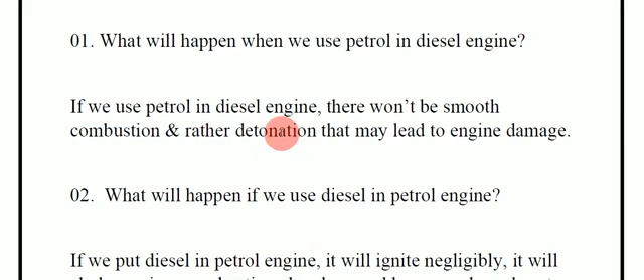First question: what will happen when we use petrol in a diesel engine? If we use petrol in a diesel engine, there would not be smooth combustion, rather detonation, that may lead to engine damage.

Second question: what will happen if we use diesel in a petrol engine? It will ignite negligibly, choke the engine's combustion chambers, and leave smoky exhaust.

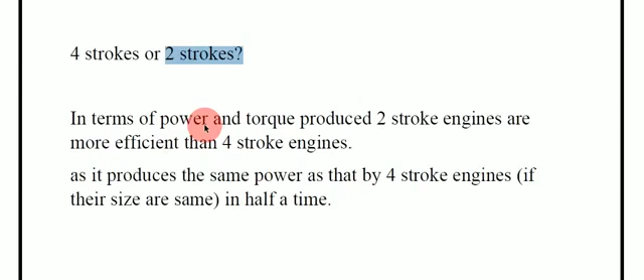Which one is more efficient, 4-stroke or 2-stroke? In terms of power and torque produced, 2-stroke engines are more efficient than 4-stroke engines, as they produce the same power as a 4-stroke engine of the same size in half the time. In terms of fuel consumption, 2-stroke engines are less efficient, and 2-stroke engines exhaust more pollutants than 4-stroke engines.

This is a very important question, so remember the difference and which one is more efficient between 4-stroke and 2-stroke. In terms of power and torque produced, 2-stroke engines are more efficient than 4-stroke, producing the same power as a 4-stroke engine of the same size in half the time. In terms of fuel consumption, 2-stroke engines are less efficient, and 2-stroke engines exhaust more pollutants than 4-stroke engines.

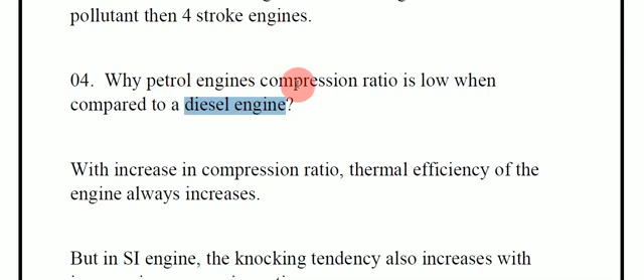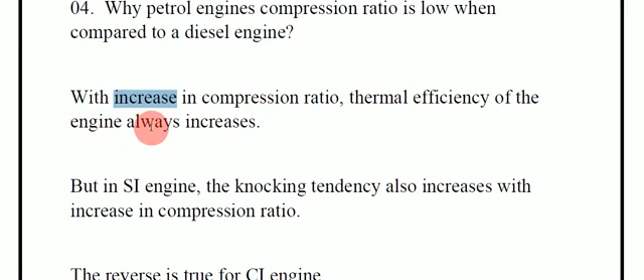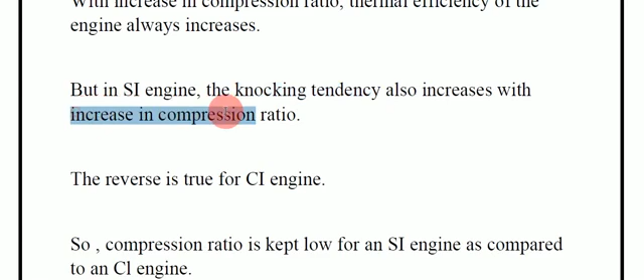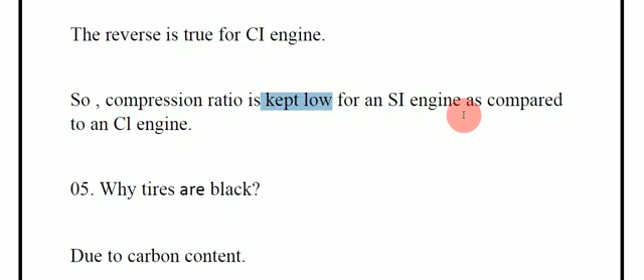Why is petrol engine compression ratio low compared to diesel engine? With increase in compression ratio, thermal efficiency of the engine always increases, but in a spark ignition (SI) engine, the knocking tendency also increases with increase in compression ratio. The reverse is true for a compression ignition (CI) engine. So compression ratio is kept low for an SI engine compared to a CI engine, because of thermal efficiency.

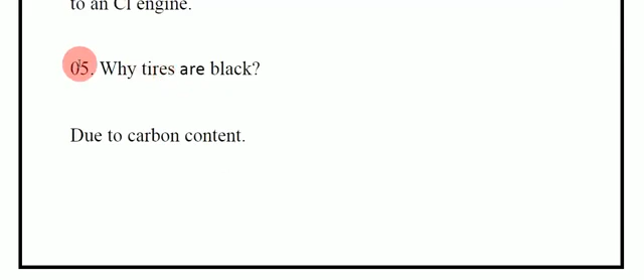Why are tires black? Due to carbon content, the tire is black.

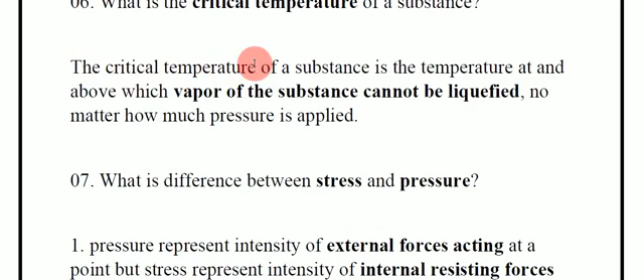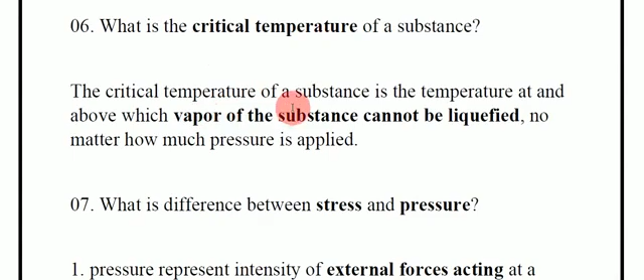What is the critical temperature of a substance? The critical temperature of a substance is the temperature above which the vapor of the substance cannot be liquefied, no matter how much pressure is applied.

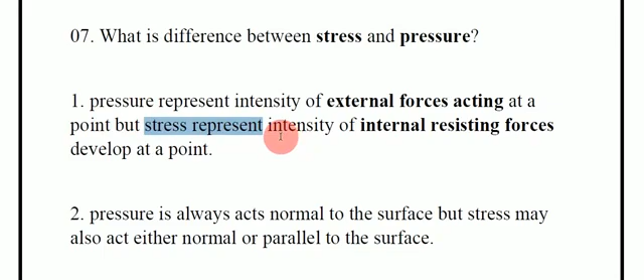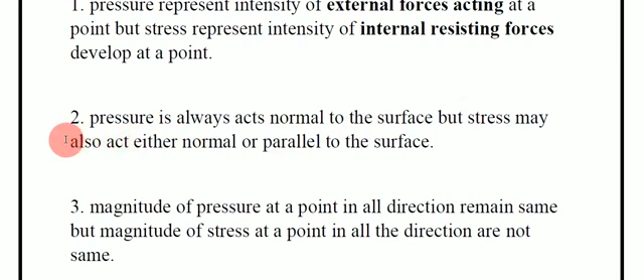What is the difference between stress and pressure? Pressure represents the intensity of external force acting at a point, but stress represents the intensity of internal resisting forces developed at a point. Also, pressure always acts normal to the surface, but stress may act either normal or parallel to the surface.

Magnitude of pressure at a point in all directions remains the same, but magnitude of stress at a point in all directions is not the same.

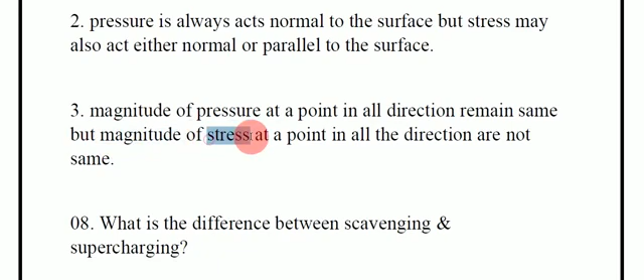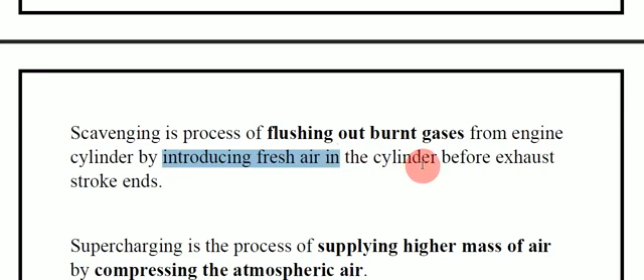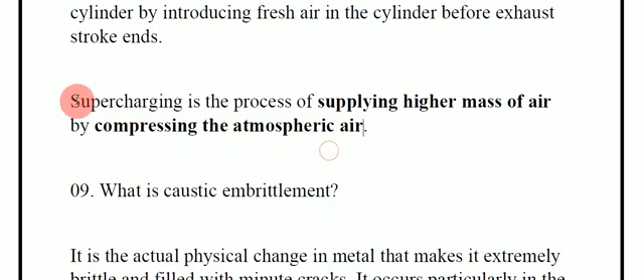What is the difference between scavenging and supercharging? Scavenging is the process of flushing out burnt gases from the engine cylinder by introducing fresh air. Supercharging is the process of supplying a higher mass of air by compressing the atmospheric air. Remember, this is the key difference between supercharging and scavenging.

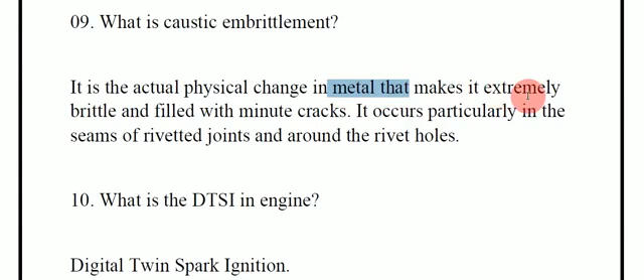What is caustic embrittlement? It is the actual physical change in metal that makes it extremely brittle and filled with minute cracks. It occurs particularly in the seams of riveted joints and around the rivet holes.

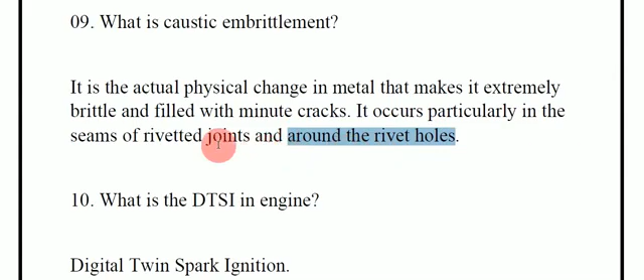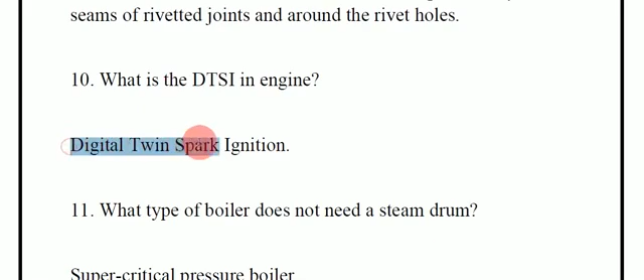What is the DTSI engine? DTSI means Digital Twin Spark Ignition. What type of boiler does not need a steam drum?

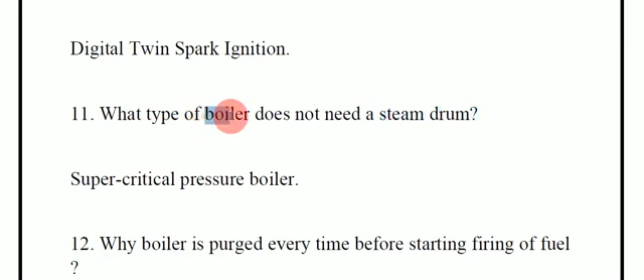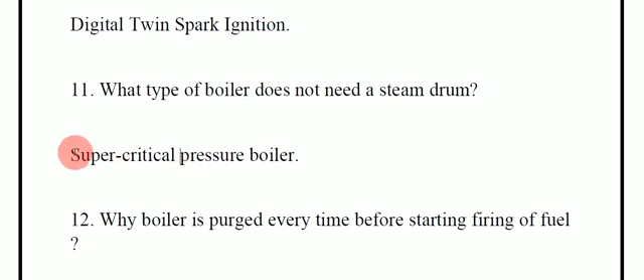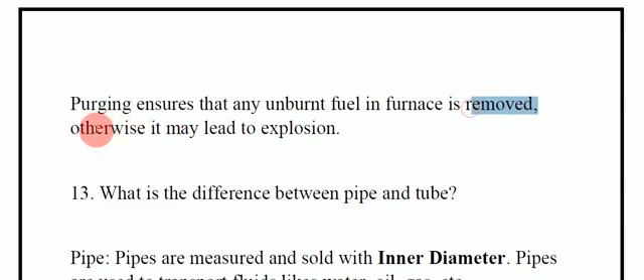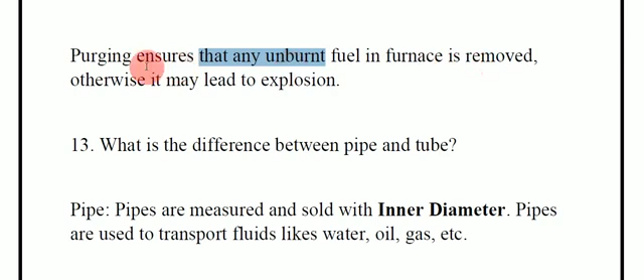Why is a boiler purged every time before starting firing of fuel? Purging ensures that any unburnt fuel in the furnace is removed, otherwise it may lead to explosion.

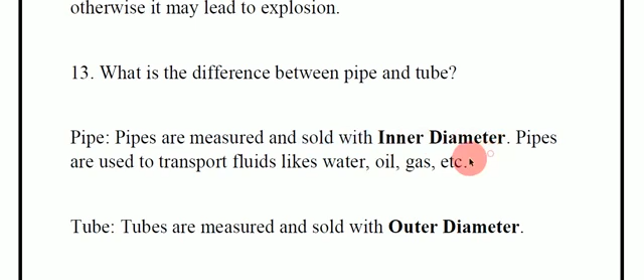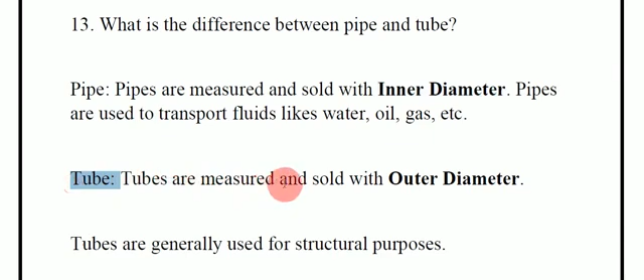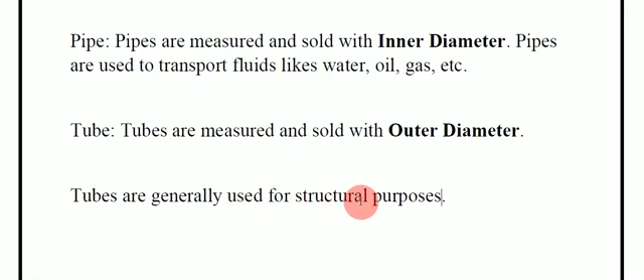What is the difference between pipe and tube? Pipes are measured and sold with inner diameter, and are used to transport fluids like water, oil and gas. Tubes are measured and sold with outer diameter, not inner diameter, and are generally used for structural purposes. This is also an important question for interviews.

What will happen if a reciprocating compressor runs in exactly the opposite direction? There will be no change in working, because the motion of the piston is unaffected by the direction of rotation.

What is the difference between a safety valve and a relief valve? A safety valve is a control mechanism that releases pressure when it crosses a set threshold and then resets back to the original position, like the valve on a pressure cooker or autoclave, where you want to keep the contents under a specified pressure. A relief valve is a mechanism to instantly relieve the pressure, triggered in extreme circumstances when the pressure has suddenly exceeded or is approaching failure criteria for the system itself.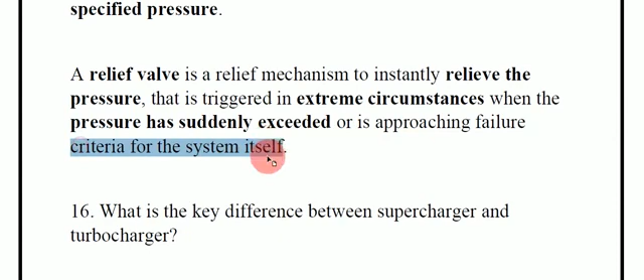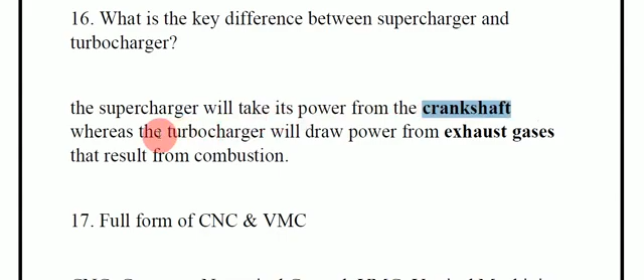What is the key difference between a supercharger and a turbocharger? The supercharger takes its power from the crankshaft, while the turbocharger draws power from exhaust gases. This is the key difference between the two.

Full form of CNC and VMC: CNC stands for Computer Numerical Control, and VMC stands for Vertical Machining Center.

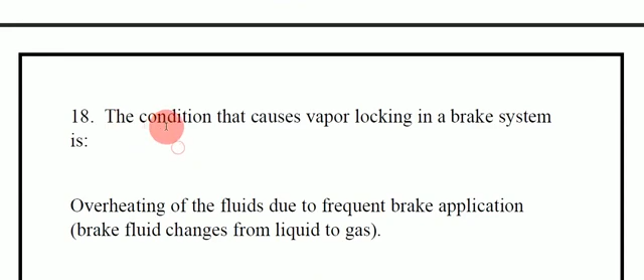What is the condition that causes vapor locking in a brake system? Overheating of the fluid due to frequent brake application causes the brake fluid to change from liquid to gas, resulting in vapor locking in the brake system.

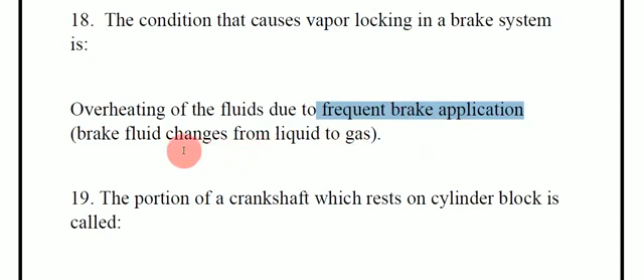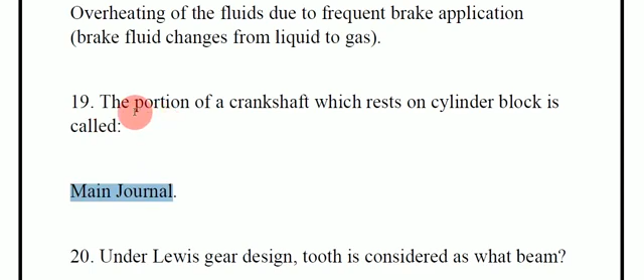The portion of the crankshaft which rests on the cylinder block is called the main journal.

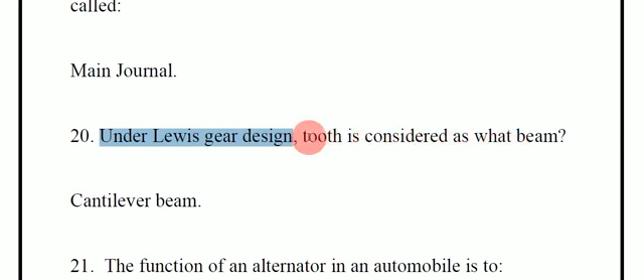Under Lewis gear design, the tooth is considered as what type of beam? A cantilever beam. The function of an alternator in an automobile is to continually recharge the battery.

We all know the alternator's work is to continually recharge the battery.

What is the flash boiler? A flash boiler is a type of water tube boiler. The tubes are close together and water is pumped through them.

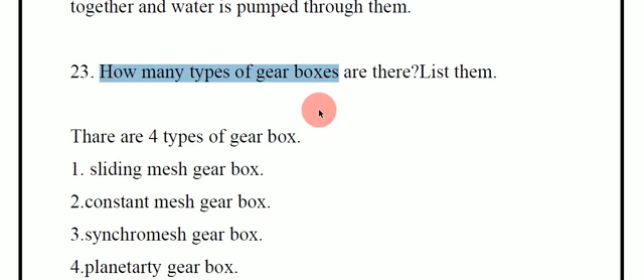How many types of gearbox are there? List them. There are 4 types of gearbox: sliding mesh gearbox, constant mesh gearbox, synchro mesh gearbox, and planetary gearbox.

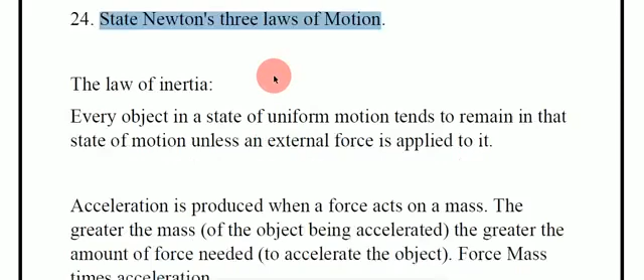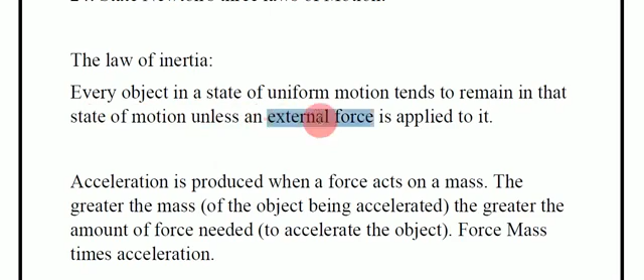Now another important question: state Newton's 3 laws of motion. First, the law of inertia: every object in a state of uniform motion tends to remain in that state of motion unless an external force is applied to it.

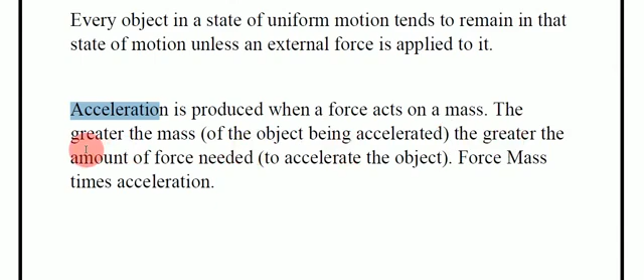Acceleration is produced when a force acts on a mass. The greater the mass, the greater the amount of force needed. So force equals mass times acceleration. And third, for every action there is an equal and opposite reaction - this is the third law of motion.

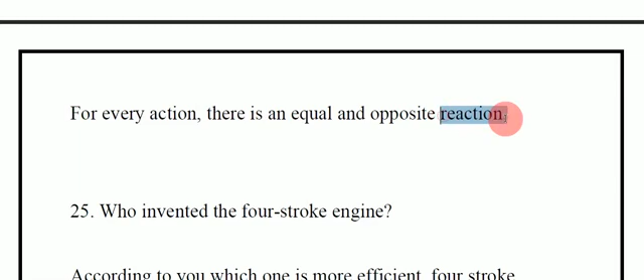Who invented the 4-stroke engine? According to you, which one is more efficient, 4-stroke engine or 2-stroke engine? This is a repetitive question in interviews. Who invented the 4-stroke engine, and which is more efficient, and why?

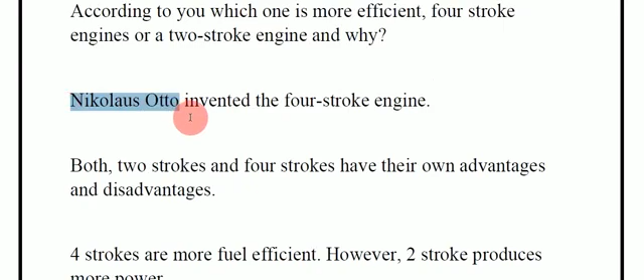Nikolaus Otto invented the 4-stroke engine. Remember this name, Nikolaus Otto. Both 2-stroke and 4-stroke have their own advantages and disadvantages. 4-stroke engines are more fuel efficient, while 2-stroke engines produce more power.

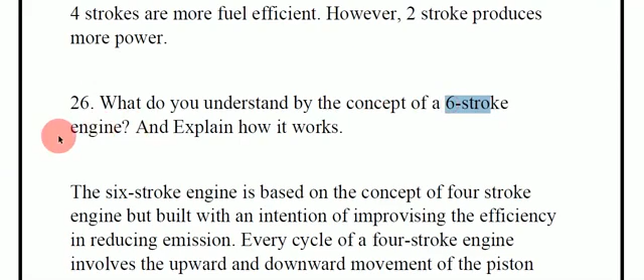What do you understand by the concept of a 6-stroke engine, and explain how it works?

The 6-stroke engine is based on the concept of the 4-stroke engine, but built with the intention of improving efficiency and reducing emissions. Every cycle of a 4-stroke engine involves the upward and downward movement of the piston, which happens twice in the chamber, resulting in 4 total strokes, one of which is the power stroke that provides torque to move the vehicle. The 6-stroke engine works similarly, except that there are two power strokes.

What is torque? Very important. Torque is the force that causes rotation. It is a measure of how much force is acting on an object, making it rotate.

What is the difference between torque and power in a vehicle? Power determines the speed of the vehicle, while torque determines the time in which that speed can be reached. So the greater the torque figure, the faster the acceleration - the more torque in the engine, the faster you accelerate. Power is the rate at which work is done; it is basically the potential of the engine.

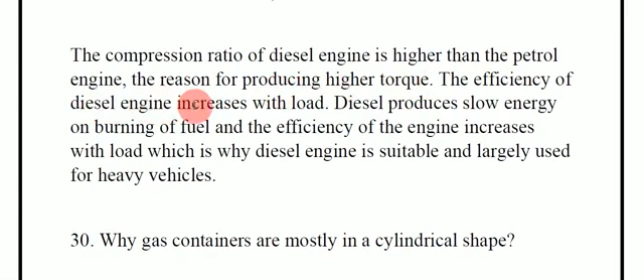Why do heavy vehicles use diesel engines? The compression ratio of a diesel engine is higher than that of a petrol engine, which is the reason for producing higher torque - the efficiency of a diesel engine increases with load. Diesel produces slow energy on burning of fuel, and the efficiency of the engine increases with load, which is why diesel engines are suitable and largely used for heavy vehicles.

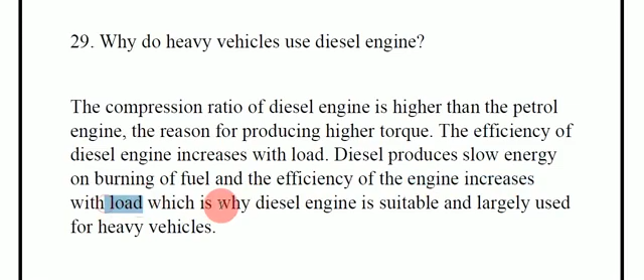Again, the compression ratio of a diesel engine is higher than that of a petrol engine, the reason for producing higher torque. The efficiency of the diesel engine increases with load - diesel produces slow energy on burning of fuel, which is why diesel engines are suitable and largely used for heavy vehicles.

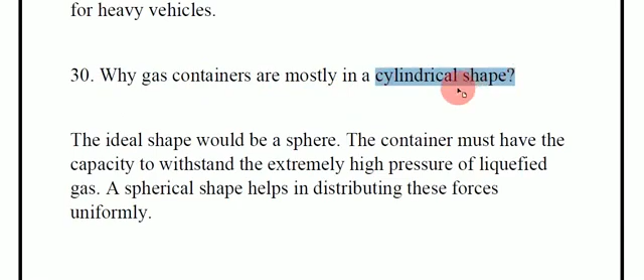This is the last question: why are gas containers mostly in a cylindrical shape? The ideal shape would be a sphere, as the container must have the capacity to withstand the extremely high pressure of liquefied gas - a spherical shape helps in distributing these forces uniformly.